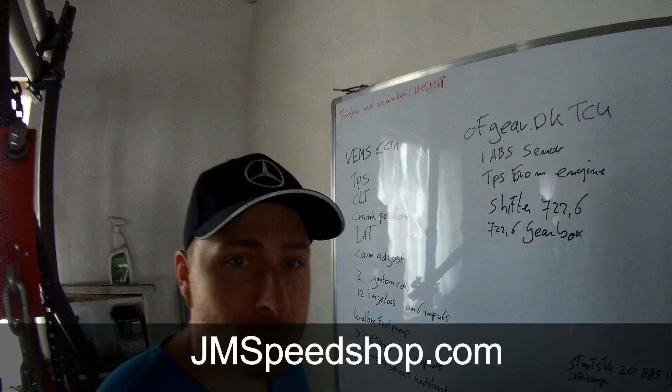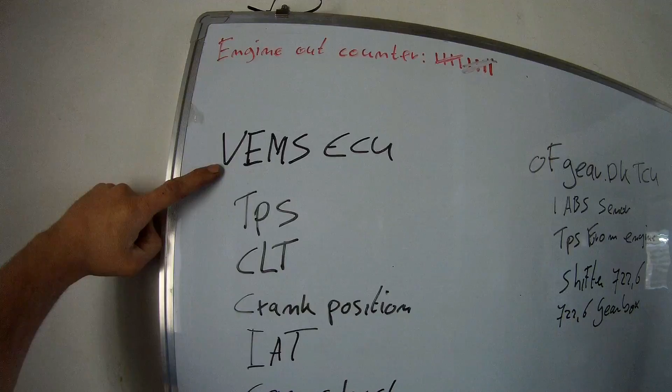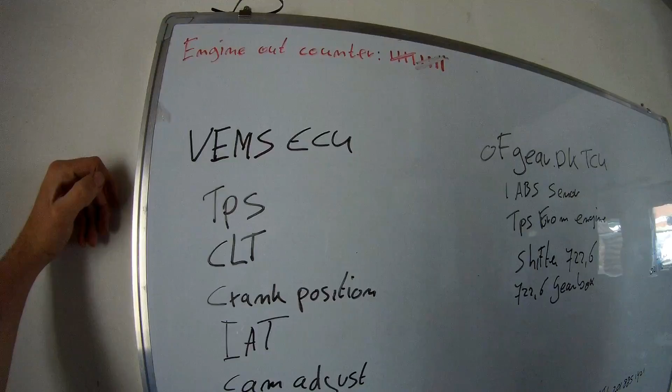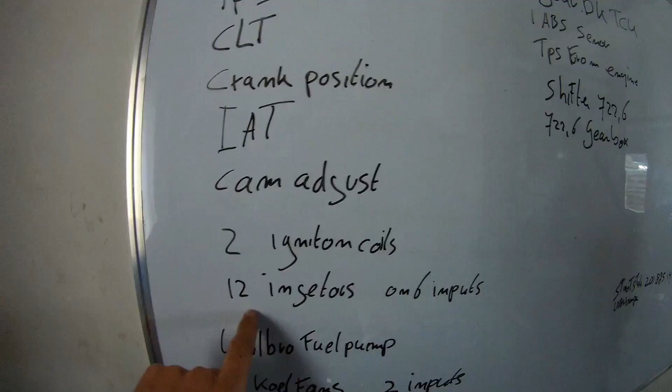So at first, I used a VEMS ECU. Why is my pen going down? A VEMS ECU, that's just a standalone ECU. You can run up to 8 cylinders individually, control them individually. So that's 8 injection inputs and 8 ignition inputs. I've got a V12, so in my engine's case I've got 12 injectors on 6 inputs. So they are paired by 2 injectors on 1 input.

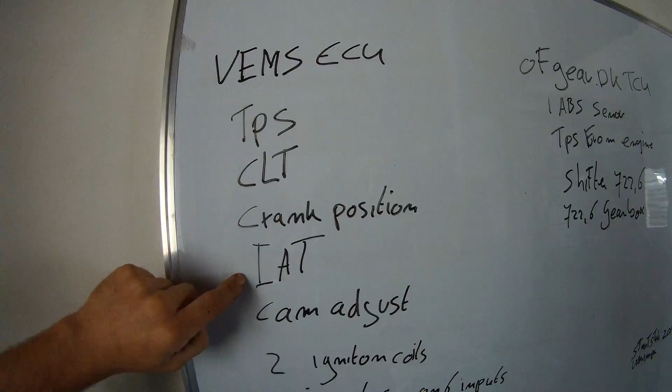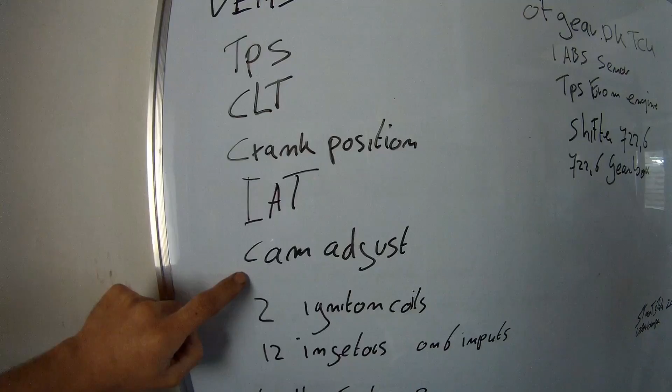For the rest, all the sensors I used were just throttle position, coolant temperature sensor, crank position, inlet air temperature sensor, cam adjust. That's of course optional, whether your engine has it or not. These V12 engines all have an adjustable camshaft on the intake. That's just on or off. The amount of degrees I'm not sure, but it's just an on and off switch.

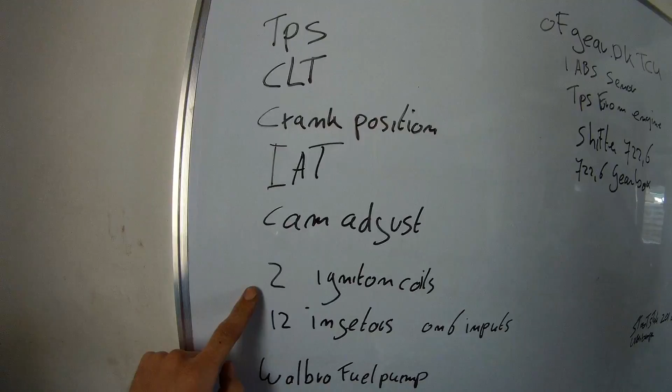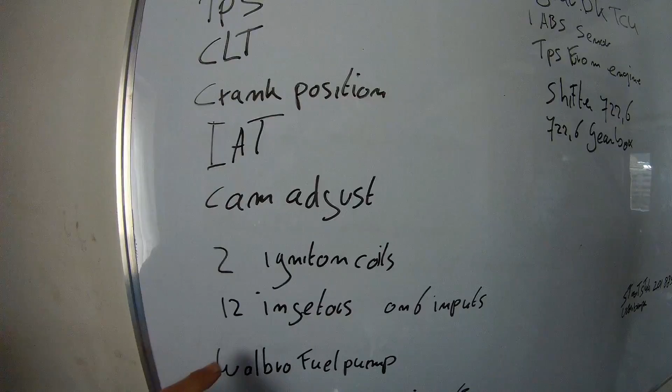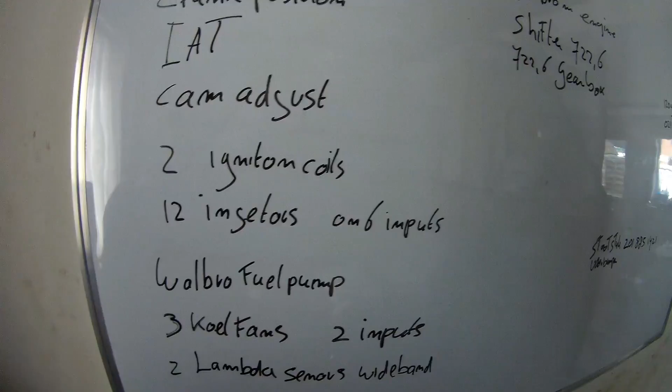I've got 2 ignition coils. Originally I had distributor ignition. Distributor ignition was on this M120 V12 up till 1995, around that. 12 injectors, they're just original. Walbro fuel pump, with an original fuel filter built into the original housing. 3 cooling fans on 2 inputs and 2 wideband lambda sensors.

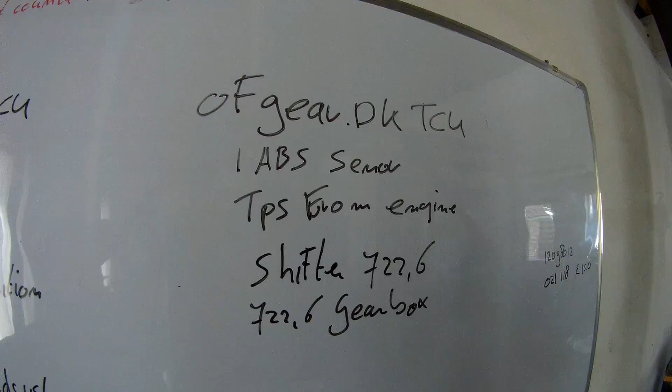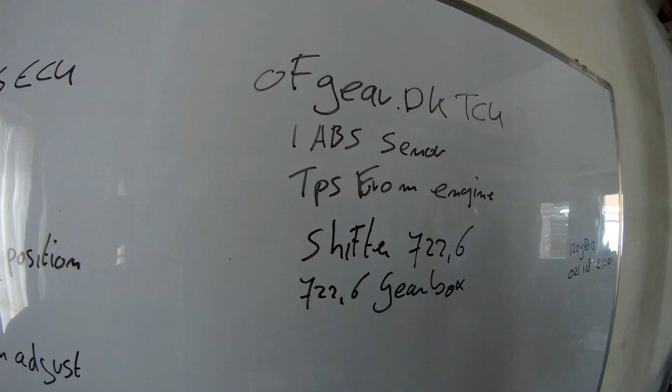My gearbox controller is an OfGear gearbox controller. You can find a lot of info about it on OfGear.dk. That uses these inputs: the ABS sensor, wheel speed, and throttle position. And if you have a turbocharged car, diesel or petrol, you can also have a boost sensor input. Why is that? Because the load of the transmission is then not controlled only by the throttle position, but also half, so 50%, by your boost.

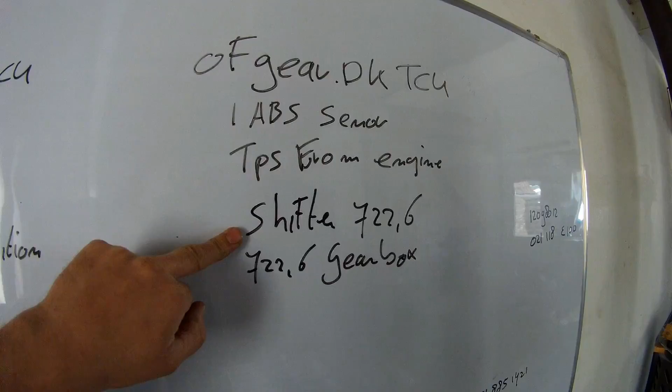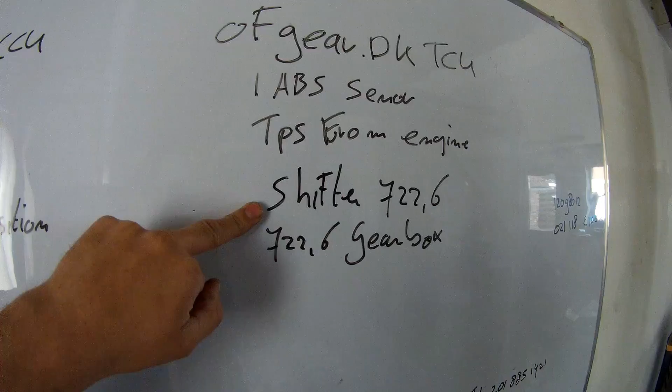I'm using just a 722.6 shifter. You can use a lot of types of shifters. Mine is from an ML. That doesn't have the winter/sport button. I made another one, but you can use all the shifters. If you want to know exactly what shifter you can use, have a look on OfGear.dk.

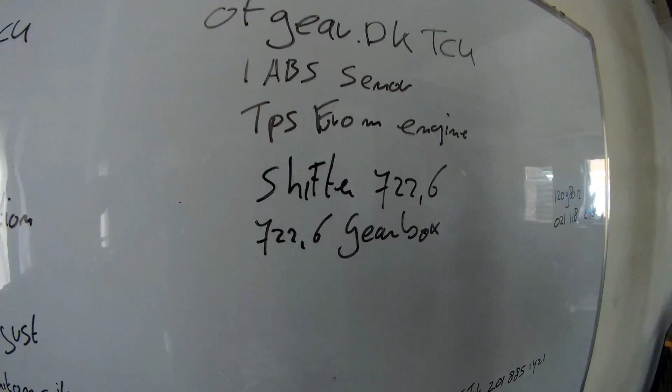722.6 transmission. It's a 5-speed electronic transmission that came on the market in 1995 in the W140. The transmission I used is from a 1996, I think, CL600, originally also behind this engine. That transmission, the 722.621, so 621, is the only transmission that fits behind the V12.

There are a lot of other bell housings that fit between different engines, like the M113 and M112 are the same, M103, M104, M102 are all the same. The CDI engines have the same bell housing and all the inline engines are a lot the same, but this bell housing will only fit behind this V12 and not behind the newer V12s, like the M137 and the M275. Those V12s that came after this one share the same bell housing, so that's also a different control.

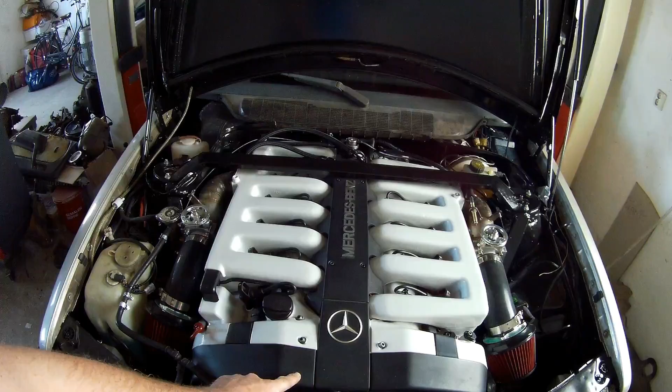So where are my sensors? The coolant sensor and the camshaft position are under here. That's the original position. The camshaft position is just 2 sensors on 1 input on the ECU. It's just on/off, switched from ground to 12 volts. All the injectors are paired. I have the numbers on paper of which ones are paired, but it's a certain pairing you need to use. Every time, you pair an injector with the one 6 further.

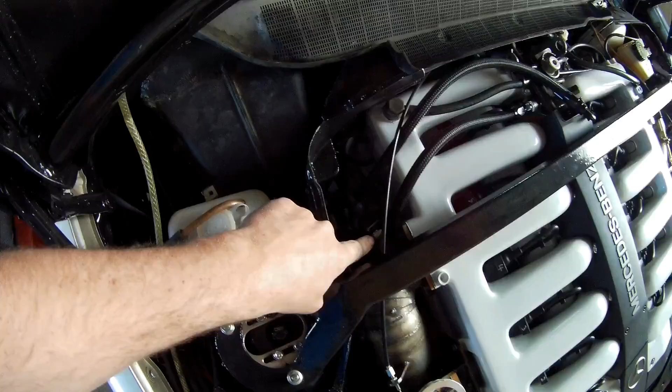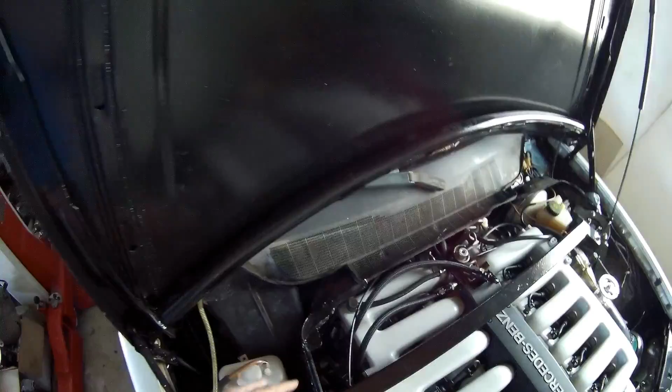My intake temperature is here, just before the intake manifold. My crank position you cannot see, but it's reachable when I take this plate out. It's just in front of the bell housing of the transmission. That's the original position. This engine normally has two crankshaft position sensors. I just use the original one, one of the two, and the other one is spare. They are both looped into the car, just put another connection on it. It's an inductive sensor, not a Hall sensor, so it creates a little voltage frequency.

So not a Hall sensor. A lot of people attempt to use a plate on the front, so they have a different crank position sensor on the front. I don't know why people do that, because it's 60-2 timing on the crankshaft originally. So this engine does not have that plate, but in 1995 they changed over to a different flywheel, and there was just a 60-2 flywheel setting on it, so you can just use that.

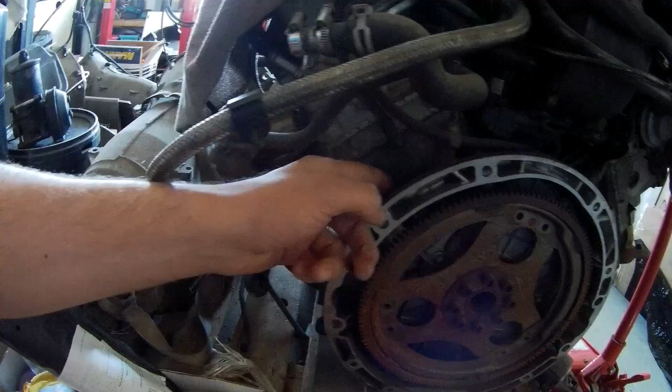So I don't know why people use different kinds of crankshaft sensors. Look, I have another engine here. I don't know if you can see that. This is an M113. You cannot see that, but you can see here it is also the crankshaft position sensor, and that's in here, and that's also a 60-2 notch. So that means you've got 60 and 2 of them are not there.

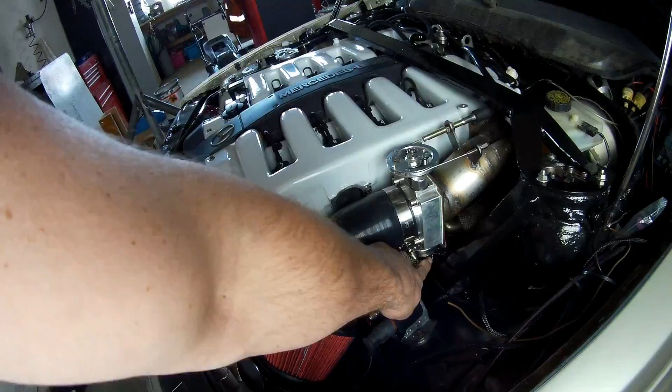So crankshaft position sensor, throttle position sensor is down below here. There's just one sensor, not on the other one. So how do my throttle bodies work? I have the main cable going to the throttle pedal, feeding this cable. When I pull this one, the other cable pulls the second throttle body, and that's how it works. The lambda sensors are under the car, of course. Fuel pump also.

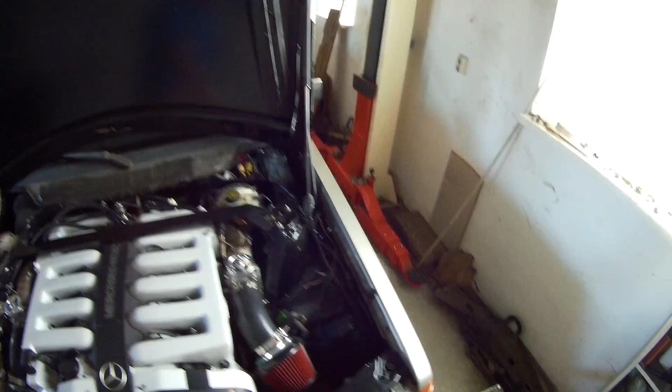So ignition wise, it's just an original setup. To keep it simple, I just have 2 distributors on the exhaust camshaft, normal position. One cable is coming out, and this one is going to my ignition coil. I bought these new. They are just the original ignition coils from Bosch. They're still available. I bought 2, and there's just a wire going back to the ECU. One is 12 volts and the other one is to the ECU. So the ECU always switches to ground.

The other side also, so I'm using 2 ignition outputs and 6 injection outputs on the ECU. So I have 2 injection outputs left. I can do something with them, like switch a fan, and I had 6 ignition outputs left over. 1 ignition output from my ECU is blown. It just died because I had a brand new bad ignition coil. Why it happens I don't know. That's also seen in the dyno video, that 1 ignition coil damaged my output, and you have to use another one.

So, for example, if you have an 8-cylinder and you're using all the outputs, then you have a very bad day, because you don't have a spare ignition output. They can be repaired, but you cannot do it straight away. So the only thing I needed to do was switch over a wire to another ignition output, select it, and then use that one for that cylinder bank.

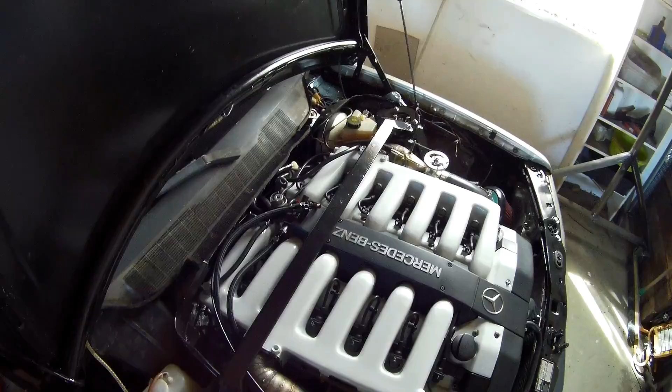So all the wires, what I did with the electronics: I have two separate fuse boxes. I've got the original fuse boxes over here. That is now only controlling everything outside the engine and the transmission. So lights, everything else is original, all the wiring is original. And everything that has to do with controlling the engine or the transmission, I'm using a separate fuse box. So the wiring loom is also separate.

So nothing is wired into each other, because that doesn't make it any easier. If, for example, you have problems in 10 years or something, you cannot find anything because you wired everything through. So I think that's not handy.

So at the front, 2 fans. These fans are on 1 output. I've got one on the back. That is also on 1 output. So at this moment, the cooling capacity is still enough. I will see how it is in the summer. It can be that I have to change these 2 fans because their output is not very big, and change them for a Mishimoto fan like the one over here.

So in the car, I have my ECU wired up underneath here. I hope you can see that. There is the VEMS ECU.

You can see it here. That's the VEMS ECU wired in. There's my fuse box. The plates can still be in front of it, but I have to make a nice fitment, so it can also be easily removed if you want to have something checked.

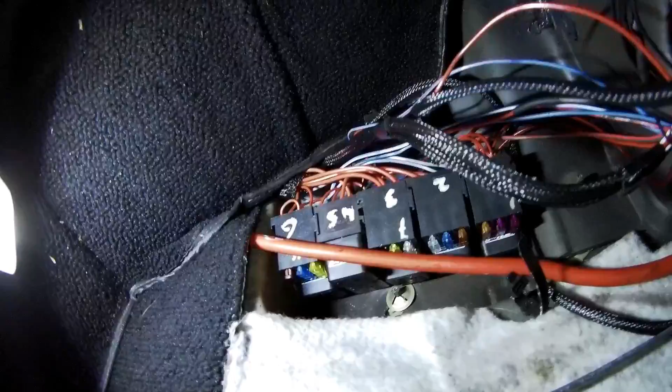So I now have 1, 2, 3, 4, 5, 6, 7 relays for all kind of stuff, and 15 fuses. 1 is not used. That's over here. 1 is not used, so 14 fuses.

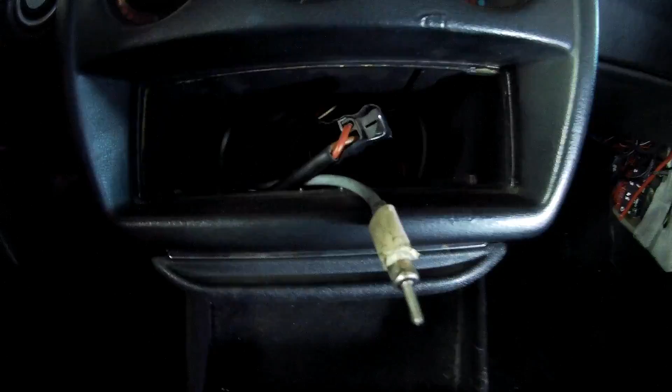So the gearbox controller. Look if you can still see it. The gearbox controller, you can see in the back, is there. That small fuse that you see, the 10 amp fuse over there, that's the fuse for the transmission controller. So for the rest, everything is wired in. So I have the control panel over here to control everything.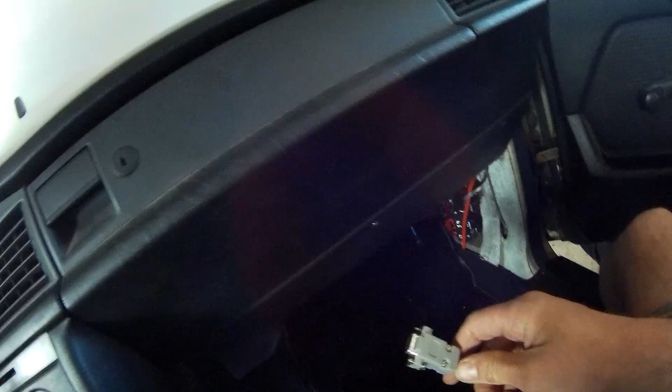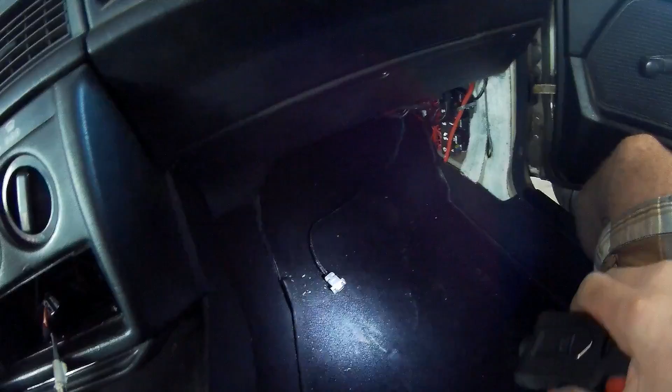What else can I tell about this system? Yeah, I got a wire here. This is my communication cable for the ECU. But my experience with it now after driving, you're not going to do anything with it when it's running good. Sometimes I'm checking that sort of stuff. I was running with the laptop connected to it.

When I didn't have the oil pressure sensor connected yet, there were a lot of people asking, you don't have any oil pressure? I had oil pressure, but it was not in view because I had a laptop on my passenger seat and was viewing that, because the sensor I had in there was an oil pressure sensor from 0 to 8 bars. It was connected to the ECU because I wanted to know if it was giving full pressure the first time I started. And it was.

This engine has 5.3 bars of oil pressure when it's cold, and then it's flowing over. And I just wanted to see if it was every time the same. So I changed that sensor now. That's just an original sensor, I think it's VDO, and those only give 0 to 3 bars, and above that they don't have any signal. So that's working. I got it connected to the dash.

About my RPM signal, the RPM signal for the tachometer is also just on an input on the ECU. The VEMS ECU can just control that, and it's adjustable. You can adjust it to the same RPMs that the ECU is reading out from the engine.

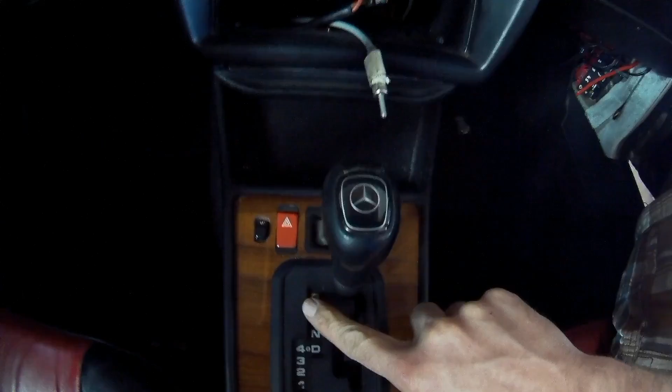Transmission wise, you can see that I have an ML one, so I don't have a sport switch. I had it already in, so I don't want to switch it over, so I'll put a separate switch in there. Controlling wise, I really like the setup. This transmission is very nice.

The only thing I need to do now is, when it's warm enough, you have to get the transmission temperature up to 80 degrees if you want to change something to your shift firmness. That's the advice Ole from OFGear told me. If you want to change something, your transmission needs the proper temperature. Otherwise, when it's colder, it doesn't feel the same. I'm only going to do it for the W setting, because the S setting is just a sport setting and I don't care how hard it shifts.

Now if I go above a certain throttle position, I still feel the shifts a little bit. So I want to change it a little bit, not too much. But I'm very pleased with it. If you want to switch to a 722.6 transmission, I can just recommend it. I'm going to do it with my next car also. I'm really happy with it.

It drives very good. My advice on that is just try to have a transmission that's clean and always have a look if the valve body is clean and your solenoids are working and that sort of stuff before you connect it. Because if you got any faults with it, you know that your transmission is okay or it's just a wiring issue. Just try to have it as clean as possible.

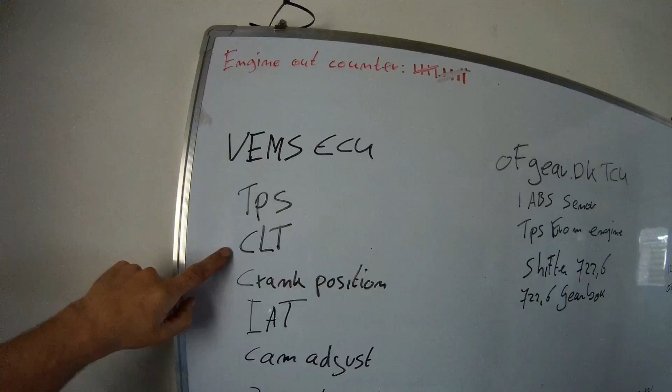So I hope I covered some of the information people wanted to know. If there are still any questions, just ask me about them. A lot of stuff is just original. So, what is aftermarket: the throttle position is an aftermarket sensor. Coolant temperature, I just bought a new one, but you can also use the original one. Intake air temperature is an aftermarket one.

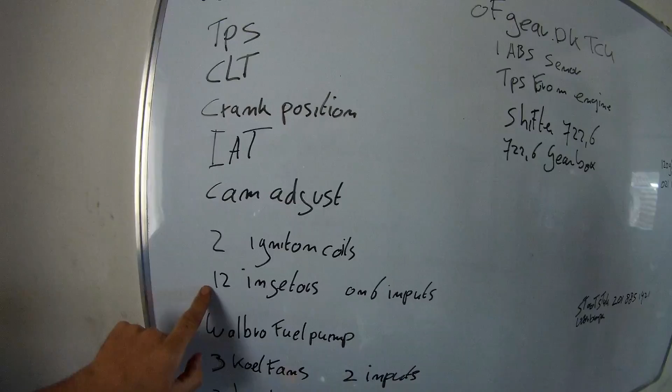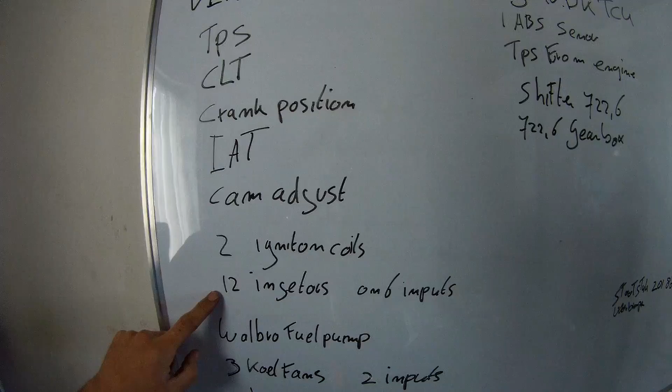Crank position is original. Camshaft adjustment solenoid is original. Ignition coils are all original. The cables, everything is original. Some parts are renewed, of course. Injectors, I put new O-rings, new caps on them. Also original injectors, I thought they were 255 cc original. I think they were good enough in this engine to about 550 horsepower or something with a V12. I calculated it. Fuel pump, I'm not sure what it was, but it was also good enough for 650 horsepower of fuel.

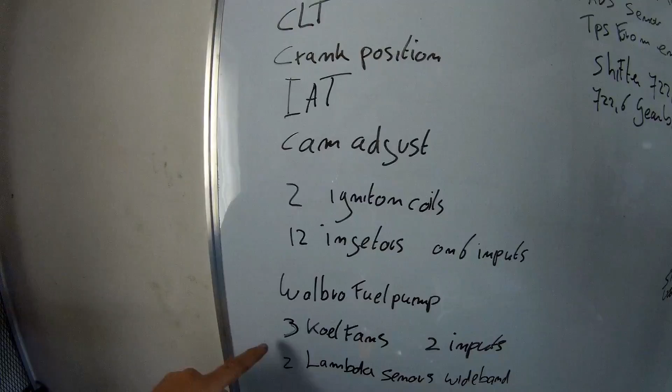Cooling fans, the original ones on the front are just cheap Chinese ones. I'm never going to buy them again because they don't give enough air. But with the other Mishimoto fan on the back, it's good enough for this car. Maybe for some cars it's good enough, but I'm not going to buy them again because they don't give enough airflow. And this one on the back was about 80 or 90 euros, and it's just perfect. So they work on smaller cars, but I cannot advise them.

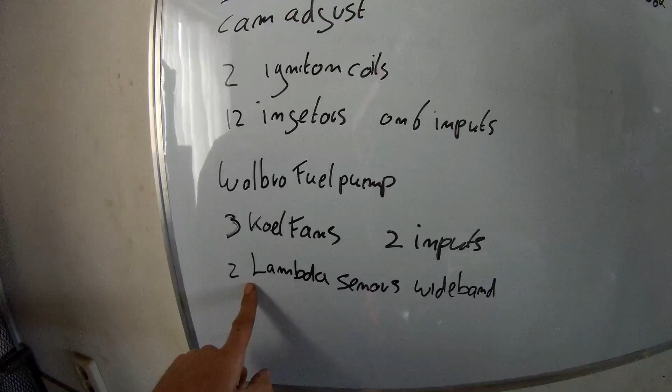Lambda sensors are just Bosch wideband lambda sensors. The ABS sensor is original. Throttle position is the same as on the engine. Shifter is just an original shifter. Gearbox also. The only thing I did to the transmission is the 3 to 4 shift flare, I drilled it a little bit bigger. All the info is on OfGear.dk. So, hope you liked all the info.

Maybe what is also nice to know, the air filters are Apache air filters. I also used them on my car from a few years back. It's just a very good filter. There are some tests on the internet showing that these filters have the lowest restriction as an open air filter. A lot of people also think that I'm sucking in warm air. When I'm standing still in traffic, that's fully true. But when I'm driving, there's more airflow coming through the engine bay than the engine is using.

That's my conclusion, because when I'm driving with a laptop, the intake air temperature the sensor is picking up is only 1 to 2 degrees higher than the outside temperature. So when I'm stopping, this is hot and my intake is still very cold. So these holes are working very good, and I needed them because otherwise it was sucking in hot air. So that's about the engine controls.